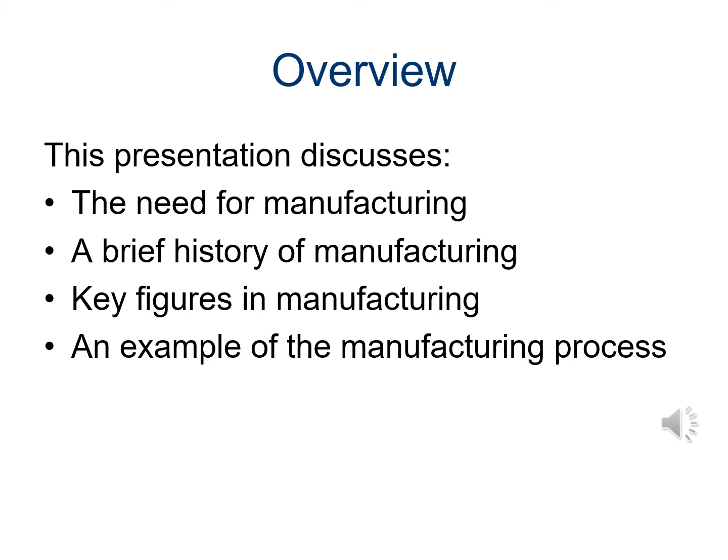Again, it's about money, right? So manufacturing, we're making stuff that people want. So about 20% of the American GDP is coming from factories. It's about 17% of everybody in the workforce works in the factories. And that means about 80% is a service economy.

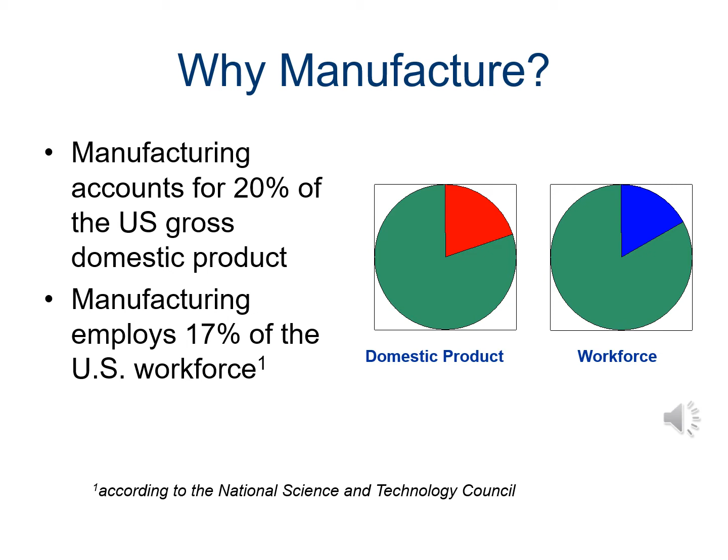And as you look at the pandemic, the different countries that have a higher percentage of GDP come from manufacturing are faring much better than the service centered economies, China, India. So manufacturing is important, and it's actually going to keep us afloat during the pandemic.

Now, manufacturing has been going on for a long time. Ever since Homo erectus chipped his first piece of flint, or even chimpanzees will do some forms of manufacturing to make tools to catch termites. But they're all handcrafted, right? And one at a time, handcrafted.

There's one really big example that stuck out like a sore thumb. It's the Venetian arsenal, and this came out about the 1200s or so. And what they did is they just dedicated about 110 acres to making warships, right? And they developed a new technique, called the frame first system, and they could pump out one of these boats every day, which is incredible. And that's why they became a big Navy superpower.

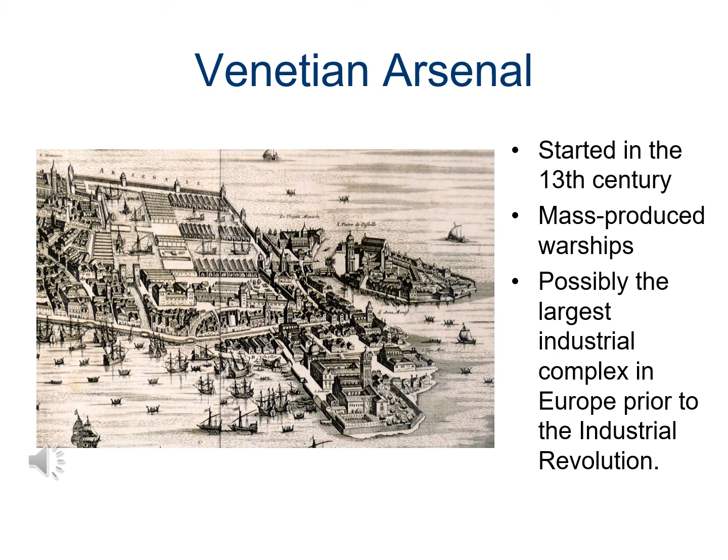They make some other things. So they improved on muskets and things like that. It's still in business today. It's 950 years of the same factory, same location. One time it had 16,000 employees in the 1500s. So it's a big deal.

Again, most people prior to the 1800s, it was all handcrafted. Everything was crafted, which is all right. I mean, you had the guilds and stuff, and they were very good. Some of the products, but they were all unique. Even the same, looks like the same gun, but it's not the same gun. Every one is unique because they're all handcrafted.

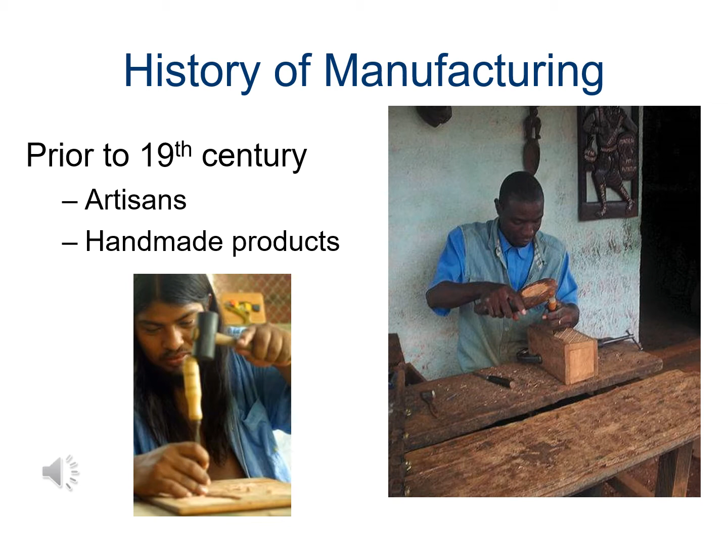They still do this sometimes today. I'm thinking like craft beers and things like that. They say they had a better quality. We'll talk about what quality is in later classes. But this is the way they did it, and some people still do it that way, one at a time, crafting everything.

Okay, this is the metal part of a musket, and if you look at this, prior to about the 1800s, if you had a musket made, all these metal bits would only fit in that one stock. And if a frizzen spring broke, well, guess what? You had to go have a custom-made frizzen spring because each frizzen spring was custom fit to each frizzen. The parts just worked on that one gun.

So if something broke, you were basically screwed, right? Imagine battle, you got your musket, and all of a sudden something like the hammer will break. You're pretty much left with a pointy stick for a weapon.

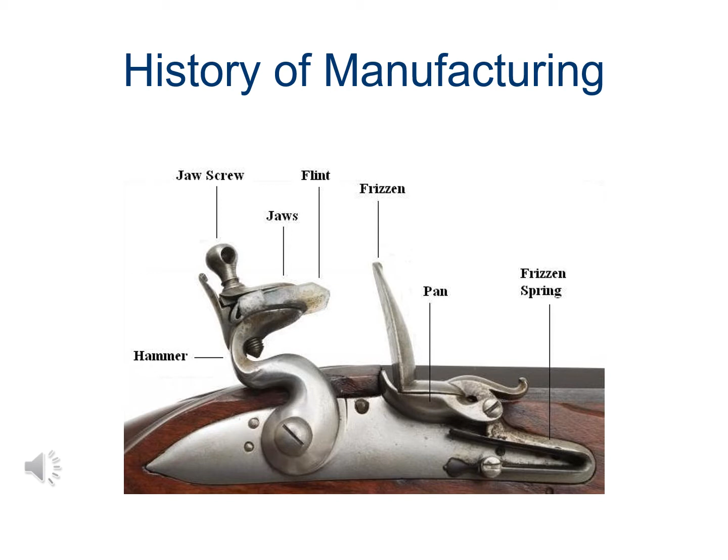Well, there's a gunsmith in France named Blanc. He says, well, look, if we have interchangeable parts, in other words, if I had a broken frizzen spring, I could just get a brand new frizzen spring and replace the broken one, and it'd work in any gun, any musket, right? So he's in France. Jefferson's over there as the ambassador. Well, he tells Jefferson about this.

Meanwhile, in America, Eli Whitney's there, and he's invented the cotton gin. Went bankrupt, actually. But he went up north to make his money again. So Jefferson comes back and tells Eli Whitney, by the way, that's Eli Whitney's picture, and says, hey, I got this idea from a Frenchman. It's called interchangeable parts. And the United States Army needed some muskets, big time. That was the part that was holding our army back.

So Eli Whitney says, well, here, let me do it. So what he did is he invented some machines, milling machines, and he started making interchangeable parts. And then he would break the assembling of things down to smaller and smaller parts. So it took less and less skill for the person working there. It's huge, right? You no longer had to be a skilled craftsman to make a gun. And he's a pretty good guy. He tried to treat his factory workers with respect and pay them well.

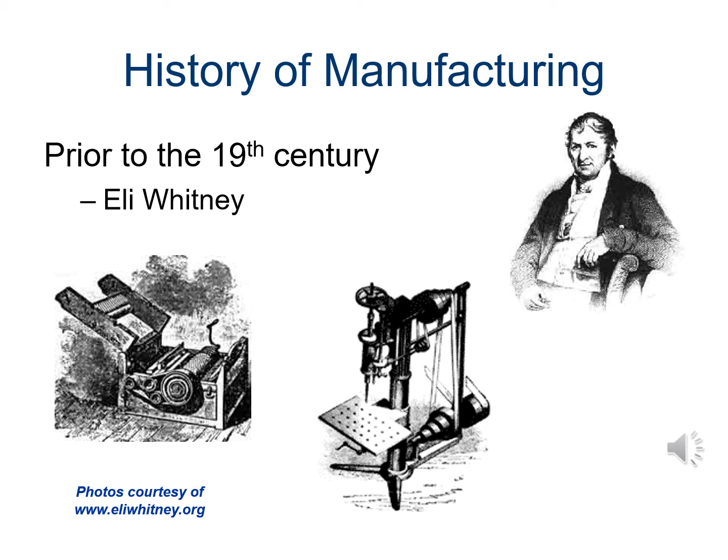He didn't get that idea, didn't catch on so much, but Eli Whitney, first American to use interchangeable parts.

Well, this is Henry Ford. He stands for the assembly line. And what he did is he put the assembly in proper order. In other words, you had to do certain steps, right? And again, he tried to break down things into smaller parts, just like Whitney did, and have one guy like put on the lug nuts. That's all he's going to do, right? And

he's always thinking. I was up in Kingsford, Michigan, and there's a foundry up there. Well, he had parts of the foundry come in these big wooden crates. He had the wooden crates specified, and they had certain holes in the crates on the side, and nobody knew what they were for. But they said, well, I guess he has his reasons. We don't know. And what he'd do is he'd take those wooden crates, those pieces of plywood basically, and that was a floorboard for this Model T, right?

But he had some trouble with his workers. Same thing. He never caught on to Whitney's idea of treating them with respect. There's one year, I think it was like 1911. There were 200 severed fingers in his factory, right? So he said, okay, enough of this. He goes, I'm going to go from about $2, $2.50 a day. I'm going to start paying people $5 a day.

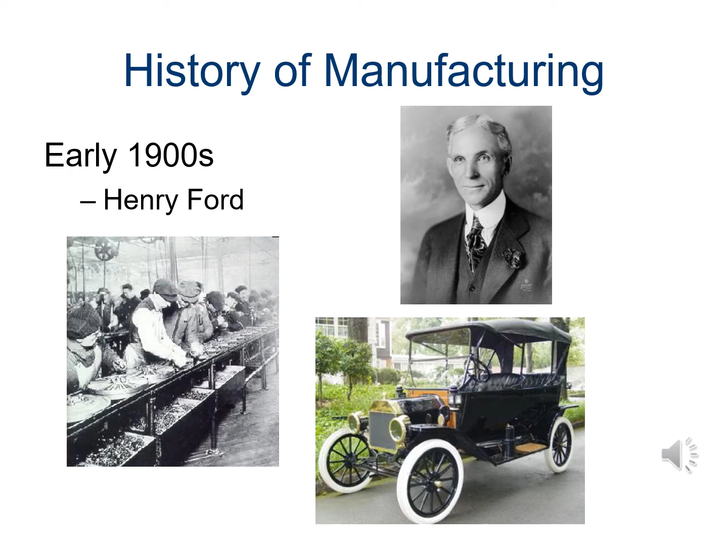And in fact, that's why my ancestors came from Eastern Europe and settled in Michigan. Henry Ford brought them over there to work in these factories, right? And it's pretty cool. He got the price of this car down to about $300 per car, which is about 6 months' salary. Well, it used to be about 3 years you had to save up for a car. That's if you spend none of your salary. A little bit of trivia: the first human killed by a robot was in a Ford factory in 1979. He got hit by a robotic arm.

This guy's name is Kiichiro Toyoda. He's a big manufacturing guy. He had a lot of factories in Japan. After World War II, basically they didn't have any money. So what he did is he said, well, heck, we got to buy these engines. We can only buy like 2 at a time. So they'd come in literally on pickup trucks instead of these big shipments. And he started to make money with it.

Well, they said, well, now we got enough money, we can use semis and stuff. But they put pen to paper, and they said, we're actually saving money because we don't have inventory, don't have handling costs. We're saving money by having these come in small lots. This is called just-in-time delivery. And he applied that to his own manufacturing.

If you go to a Toyota parking lot or sales, you won't see a lot of cars on the lot. That's because Toyota doesn't make the car until there's a demand for it, right? You can go to an American car lot and just see how many cars are sitting on that lot, right? So if you go to Toyota and they don't have the car you want, they'll say, okay, you can get it in about 2 days, and they make it. You do that in an American car company, they'll say, let me see if somebody's got it on their car lot, and they'll ship it from that other car lot. So

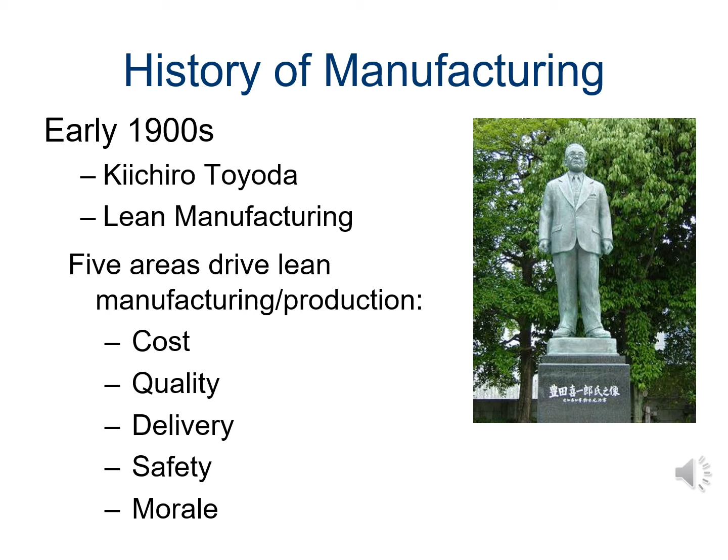Well, in the 1950s, the Webb Company made an electronically coordinated conveyor system. And this is huge. For the first time, actually, machines are getting, I don't want to say smart, but they could work with humans, right? So the thing didn't move until it was needed. And it always kept the workers stocked. It kept the pace right. It didn't go too fast, didn't go too slow. It kept up with the human worker.

Well, Ford was big on this, and he started using this. A tire would come in on a conveyor, one of these Webb conveyor belts, but it'd come in one at a time and only when it's needed, right?

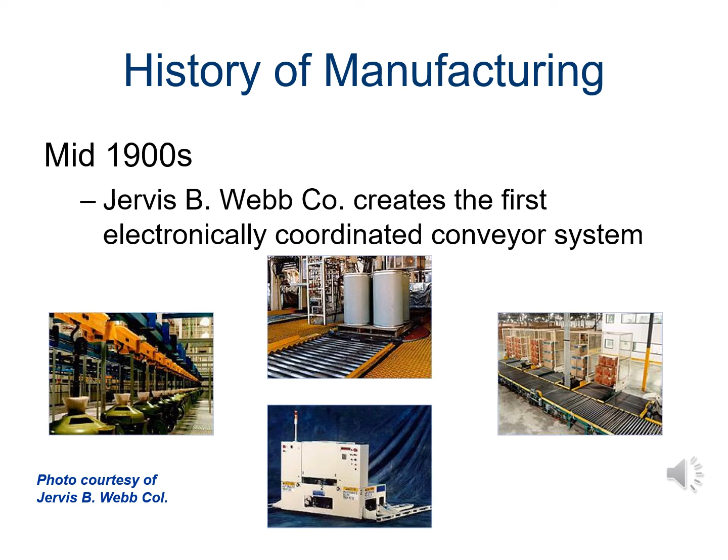I also like this because if you go to Jonesboro, there's a couple really, really big conveyor factories there. You should see what they do there now. It's incredible, the technology and how fast these things can move and how coordinated they are. I know Hytrol is working a little bit with Amazon. So is FMH, I think, to get some smart conveyor belts. If you ever bought anything from Amazon, right, and you put in the order, and about 10 minutes later it says, your order is packaged on its way or something like that.

Amazon uses these automatic storage retrieval systems. What they'll do is that you order something and no human even looks at it. It goes straight into this thing, this ASRS, and it'll go and pick out whatever you ordered and drag it over and give it to the guy that's going to pack it. The machines aren't very good at packing yet. They'll get there, I'm sure. And it's incredible. Less mistakes, faster, more reliable than human employees.

And that's the way we're going now with the factories. Automation, right? A lot of automation. And the trouble with automation is, before you didn't have a lot of flexibility in your manufacturing. The machines are getting there now. They're going to be there. A variation of this is the automated guided vehicles. You've got some big pieces. Well, they'll just set them on these vehicles, and these things will drive over there all by themselves and deliver the piece to you, right?

Artificial intelligence. Basically, they describe this as a machine will make a mistake. It'll learn, oops, don't want to do it that way again, and self-adjust itself. And what it'll do then is make the perfect process. The last car I bought, I purposely chose it because I knew it was built by robots instead of humans. Much tighter tolerances, much more exact.

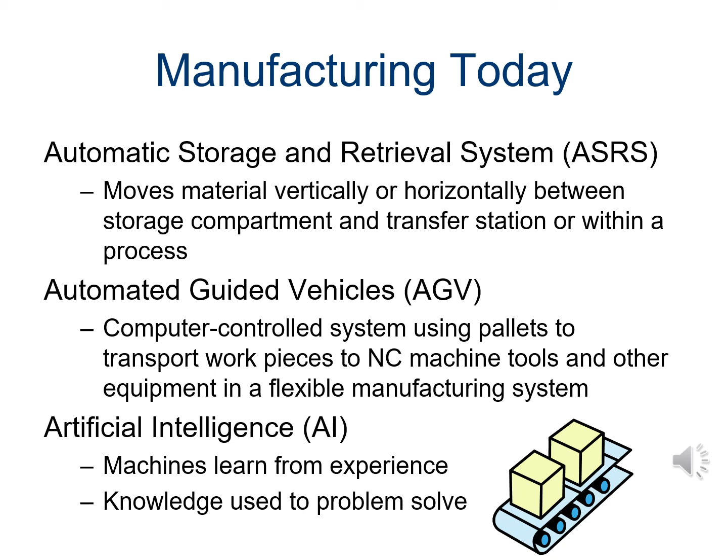Again, if you're going to be in a factory, you're going to have to be working with these computers and smart machines. It's called computer integrated manufacturing, and it's everywhere. I was up in Wisconsin working for a hydraulics factory. Had about 500 employees, and we were pumping out about $700 million worth of hydraulic product every year. I got hired on at another hydraulics factory down in Searcy. 500 employees again, and we were pumping out $110 million a year.

The company as a whole in Searcy went from about 75% market share to about 2.8% when they were bought out. The one up in Wisconsin, they didn't have a market share. They had about $6 million in sales every year. Now they own about 80% of the mobile hydraulic valve business market. And it's all done as computer integrated manufacturing.

I'm going to give you an example. The company was Husco. The customer was usually Caterpillar. Caterpillar would type in their order. It'd go into the computer. The software would spit out the shipping label, plus a list of all the valves we needed to ship that day. We would take that out to the cell, and there you go. And as soon as it did that, it'd generate the programs on the CNC machines to make the parts needed to make those valves.

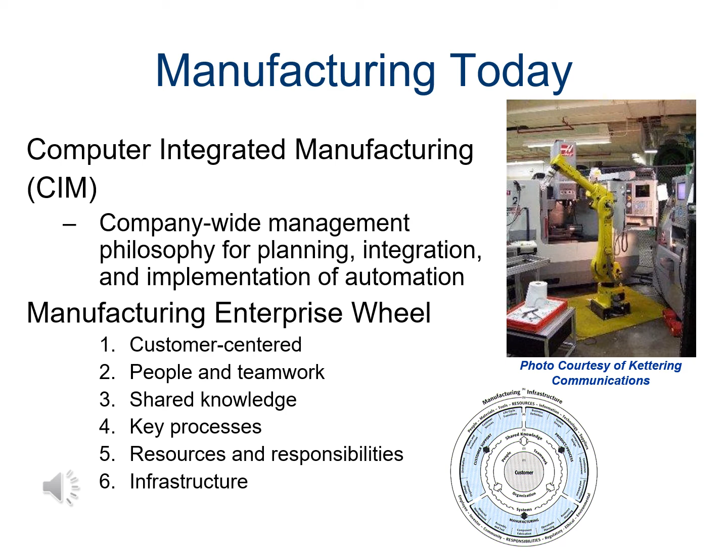In manufacturing, it's not static. It's always changing, always getting better, right? Ever since they started keeping records in about 1820, productivity in our factories, in other words, the amount of work coming out per person, has always increased quite a bit. So the Japanese word for improvement is Kaizen, Kai, Zen, good change. And it's got everybody involved, from management on down to workers to the janitor, right? And we'll talk about that a little bit more later on.

In flexible manufacturing systems, GM in the 1990s did what's called reindustrialization. They bought a bunch of robots to make specific cars. So they built this factory in Virginia to make Grand Prix and Grand Ams. And they were planning about 220,000 cars a year. Well, the economy took a dump, and they only sold 140,000. You could get a Grand Prix or Grand Am dirt cheap, and they couldn't do anything with it. That's the only car they could make in that factory.

Toyota took the approach, well, we're going to make it so we can make any car on our assembly lines, except for the Tundra, that's got a special factory.

But if you go to any factory making cars, and the economy goes down, well, not a problem. We'll just make Corollas, right? Because those are cheap cars, people will buy them. Economy goes up, so okay, good, we'll start making some Supras and Camrys, right? They can make almost any car they want on the assembly line, and they can change it over in just a matter of minutes. So you got to have flexibility. If you get stuck in one process without any flexibility, and for some reason customers no longer have that demand, you're screwed.

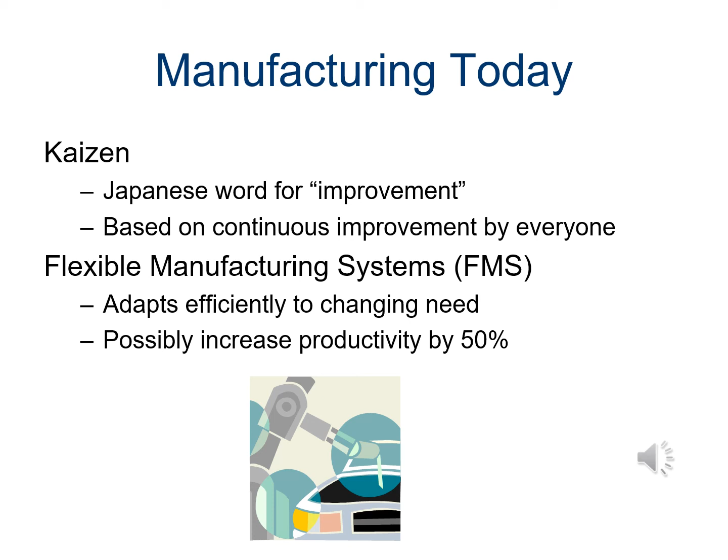So some of the big concepts today that we've already talked about: just in time, eliminating waste, which is basically any activity the customer's not going to pay for. You got flexibility, and you got to have cross-trained workers. If you have a bigger demand for Corollas, you got to have somebody trained to work on Corollas as well as Camrys, which is a big difference between what Whitney and Ford tried to do. They made it very specialized, you just did one thing all day.

Cross-training gives you more flexibility. Toyota production system, this is lean manufacturing. It goes beyond automotive manufacturing, it's everywhere. We'll talk about the difference between lean manufacturing and mass production, and all the different strategies that go into this. And finally, lean manufacturing itself - again, you're eliminating everything the customer's not going to pay for, and it's a system-wide look at it, not just individual parts.

So the state of manufacturing now is to make high quality, less expensive parts, and provide the customer only things he'll pay for.

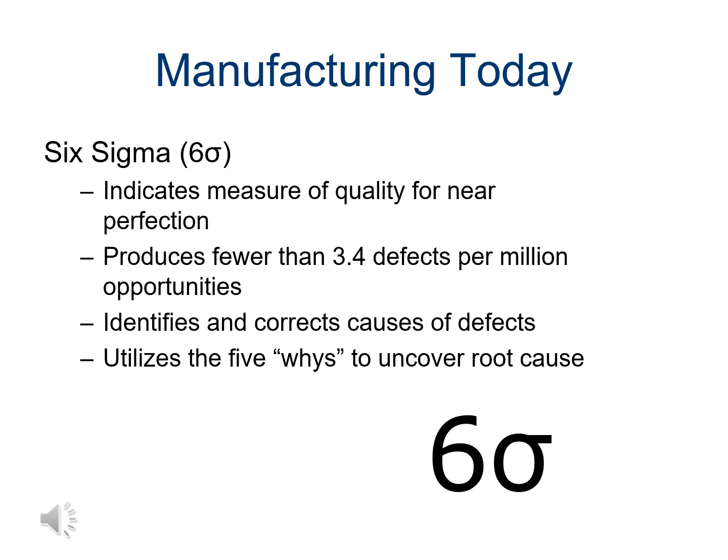The other thing I'm going to talk a little bit about is Six Sigma. What it is, it's about making things to near perfection. The thought is, if something breaks, it costs money to fix it, and plus it makes the customer mad. We'll talk later on about what 3.4 defects per million means. Basically, when you find something breaks, you put it to bed so it can't break again, so you eliminate the causes of defects. One of the most basic tools is the 5 Whys, which we'll cover later. We'll spend some time with Six Sigma too.

The thing today now is not just delivering product on time, but also developing new products faster, stronger, better. So they got this thing called rapid prototyping. You can basically build any part you want in virtual space inside the computer. The airplanes that Boeing manufactures now, when they're designed, they're flown in the computer, not in real life. And they're also flown by computers when they do the test flights, not real people.